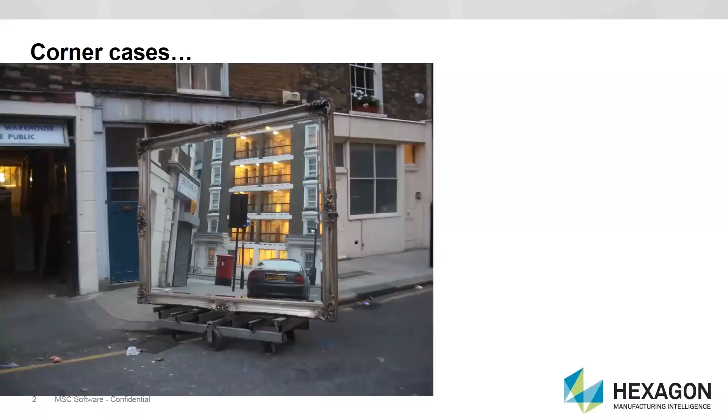So I typically have a different take on what a corner case is. A corner case is something that most of the time engineers don't think about. I don't think engineers are the best people, that they have the best attitude, to imagine these corner cases. We as engineers tend to believe in straight lines, in rigorousness. We tend to simplify reality so we can apply our knowledge. But actually, reality is way richer than our few physical laws. So think twice next time you think a corner case is really a corner.

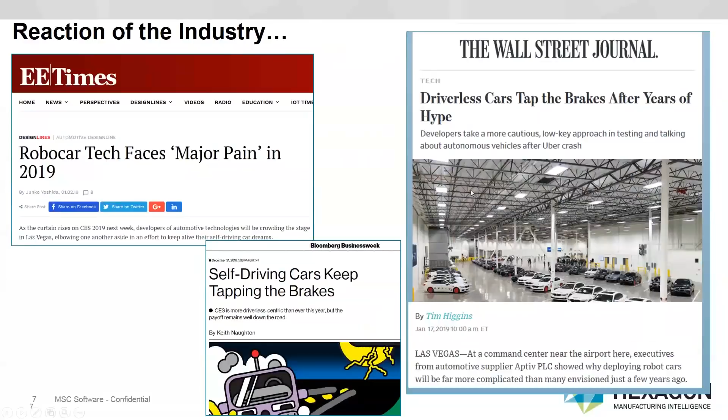You can't pretend that a human that is sitting in the driver's seat and is reading a newspaper is requested to take control of his vehicle and is able to manage a very complex situation that the system is not able to manage in a matter of seconds. You have to allow at least 30 seconds before the human regains situational awareness, takes control of the steering wheel, the throttle, the brakes, eventually even wakes up because maybe he was taking a nap, finds out what is going wrong in his surroundings, vehicles on his side, and then takes a meaningful action.

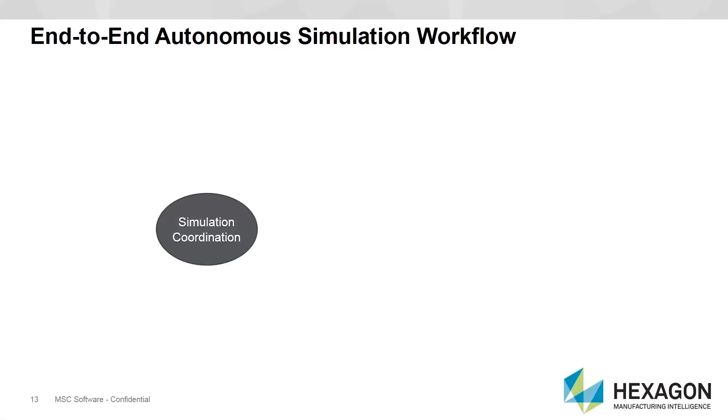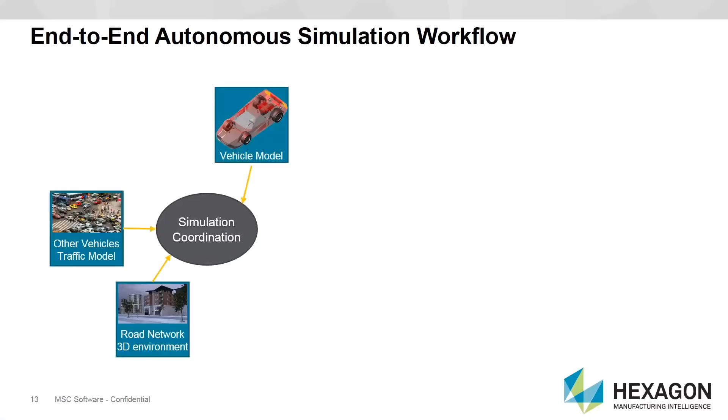So I take almost for granted that you have a vehicle model of your car, your truck, your bus, and this is the mechanical representation of the system. But then you need to build a road network and you possibly want to add a 3D environment like buildings, because buildings cast shadows. You want to model tunnels, because in tunnels your GPS signal may be weaker or absent altogether. And then you need to add other participant vehicles, typically bikers, motorbikes, buses.

Last but not least, weather conditions can affect sensors quite a lot, and rain and fog can very easily impair LiDAR and cameras. On the other hand, humidity has some consequences on ultrasonic devices and so on. And finally, pedestrians and animals. They are typically classified by Euro NCAP as vulnerable road users. So there are specific tests that, according to Euro NCAP, the vehicle needs to pass to be properly rated.

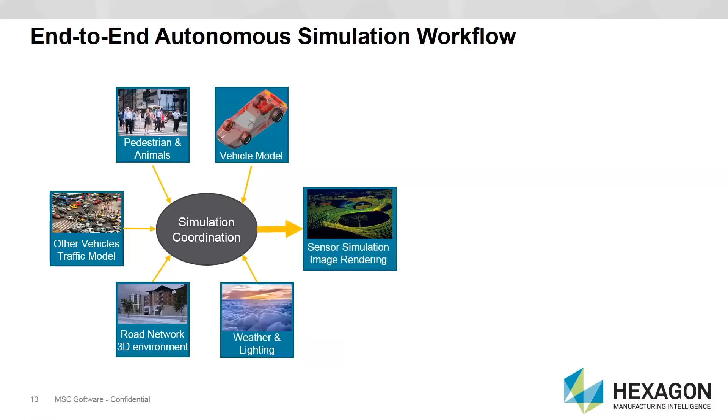Once you have all these ingredients in your recipe, the system will compute for you what your sensors will perceive of the scene. Of course, it will also provide you the ground truth, but most meaningfully it will create what your LiDAR, your radar, your cameras are seeing. And with this information, you can perform the typical steps of the self-driving workflow: the sensor fusion, the object detection, the prediction of the movement of the other actors, then the path planning of your own vehicle, and finally the actuation that closes the loop.

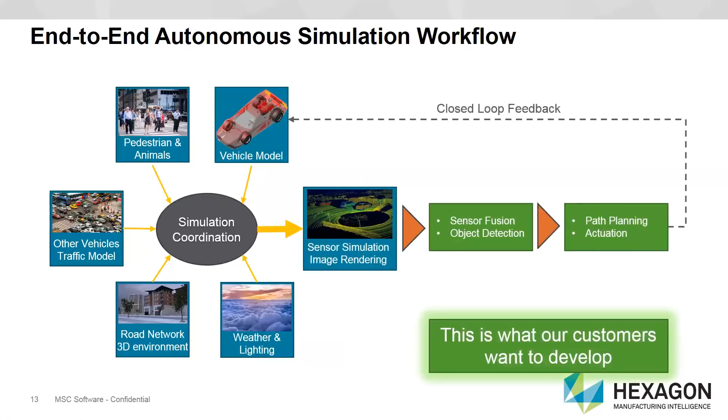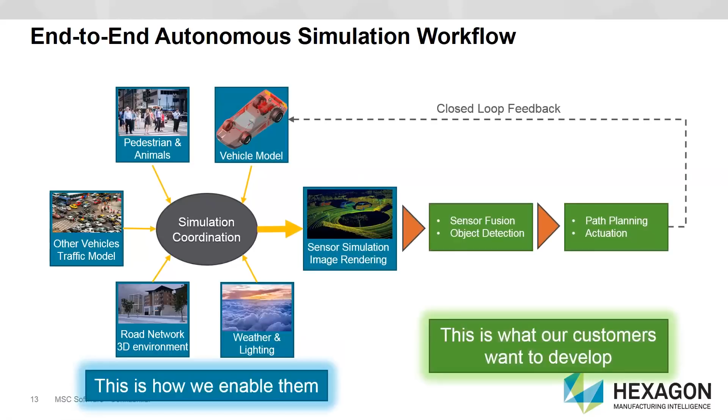In this view of the world, it's pretty clear that the green boxes are what our customers typically develop. We at MSC pride ourselves on enabling you to do this, providing a comprehensive solution for the simulation side of the story. Not always, anyway, is a full simulation workflow needed.

Sometimes, specifically for the perception phase, you can even leverage a very simplified vehicle model. You don't need that much about tire properties, not that much about damping, hysteresis, and so on. And then you basically need to generate tons and tons of images that then can be leveraged to train your sensor perception. So your AI for object detection, for proper clusterization, for determining the position of every actor. And this workflow typically runs at a speed that is far from real time, basically because you need the best accuracy in reproducing the sensor and interaction of the sensor with the environment.

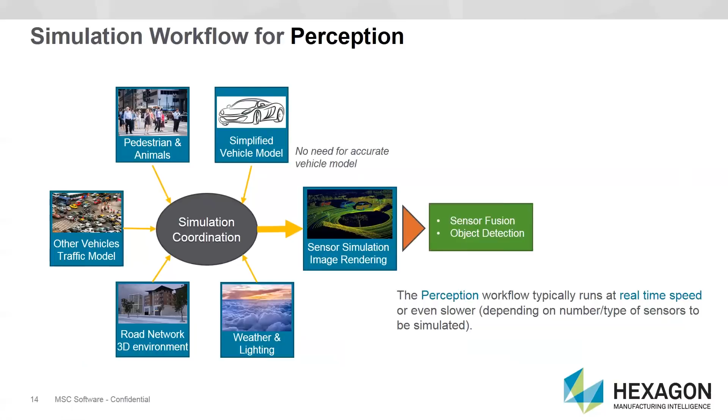Another specialized workflow is the one that is typically referred to as the path planning workflow. The path planning workflow has as a prerequisite that the vehicle has gained, maybe with some level of uncertainty, a clear understanding of its surroundings. So the sensor has already built the so-called object list: which other actors are on the road, where are they positioned, what is their velocity, their heading, and so on.

This is typically done with the purpose of training the safest path planning, the safest path forward for the vehicle, avoiding as much as possible any crash with any other participant. And exactly because we don't need to simulate the full rendering of the scene, it typically runs much faster than real time. In this case, you need a very good vehicle model because especially for evasive maneuvers, the tire friction, so the stability of the vehicle, can be really at risk.

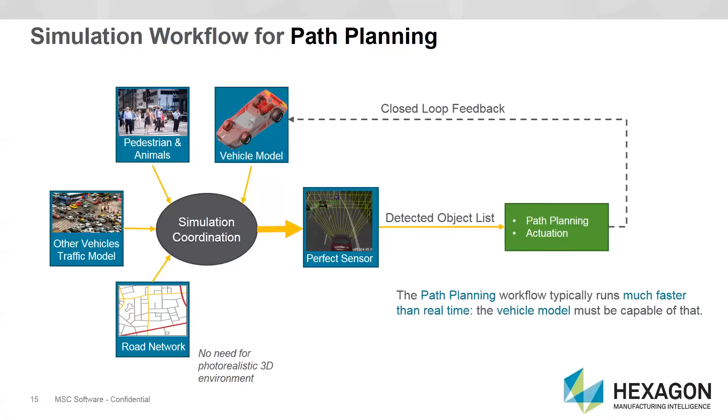So let me introduce VTD. VTD stands for Virtual Test Drive, and is an environment that allows you to do exactly what we have just described. You can design 3D environments, you can design roads, you can populate this environment with trees, houses, buildings, and many other props. Of course, you can inject all the traffic that you want according to predefined models, like the SUMO model, an open source model from the DLR, so a German model, or maybe supplied by a third party, like we are going to be very soon integrated with PTV Vissim.

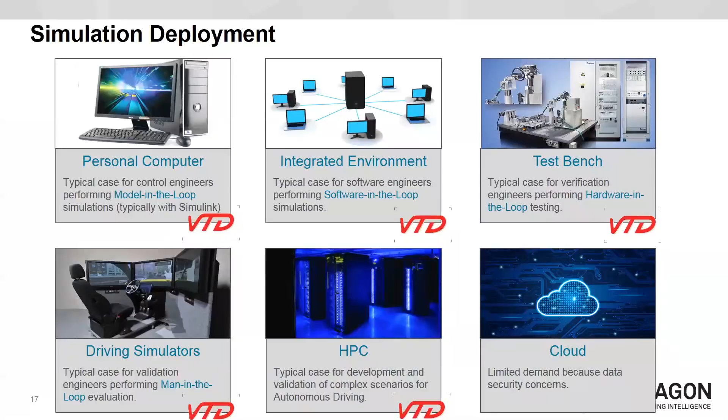And of course, we are moving into HPC, and pretty soon even on the cloud. HPC is fundamental, because we just said that we need to run millions and millions of miles of simulation, and of course you can't do that on your personal laptop. Let's go and check what is the current status of simulation adoption into this workflow.

At MSC, and especially thanks to the fact that MSC belongs to the Hexagon family, we have the chance to connect so many disciplines together. So we were just mentioning that you need a proper vehicle model, and in this case it's represented by ADAMS. ADAMS is the typical environment where engineers set up the driving attributes of a vehicle. You can design suspension, you can design the driveline, you can assess durability, NVH, comfort, and so on.

But sometimes you don't need this level of detail, so you can easily transform the vehicle model from ADAMS into an ADAMS real-time model that then, of course, can be injected into VTD, that, by the way, is vehicle agnostic, so it can use vehicle models coming from different sources. And then VTD will combine this vehicle model with the AI driver, with the traffic, with the sensors, and the 3D environment, so that the simulation workflow can be completed end-to-end.

Another part of the story we are working on at MSC is the data management, and then closing the simulation loop. Because if you are generating millions of miles at every iteration, it's virtually impossible for an engineer to look at single results. So you need a way to have proper data analytics, to have KPI and dashboarding, and possibly to have some smart sampling technique, some AI-assisted workflow that lets you dig into the cases in which the vehicle isn't really behaving as expected. And this, of course, is depicting the simulation side of the story.

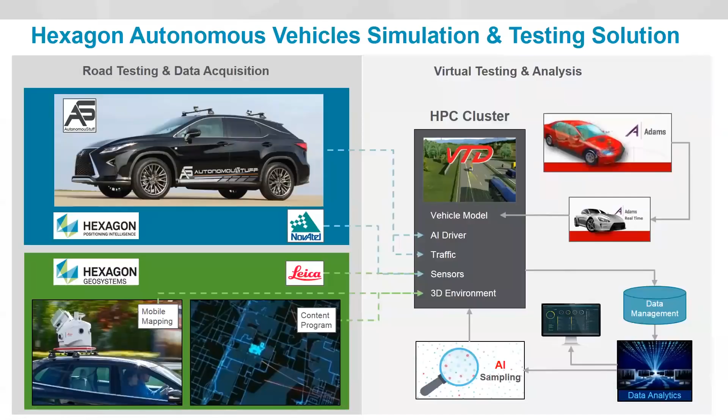The other initiative we are working on is leveraging the content program of Hexagon, where the whole US territory and the whole of Europe has been mapped from the air with cameras and LiDAR, with a resolution varying from 30 centimeters for country zones down to 5 centimeters in cities with more than 1 million inhabitants.

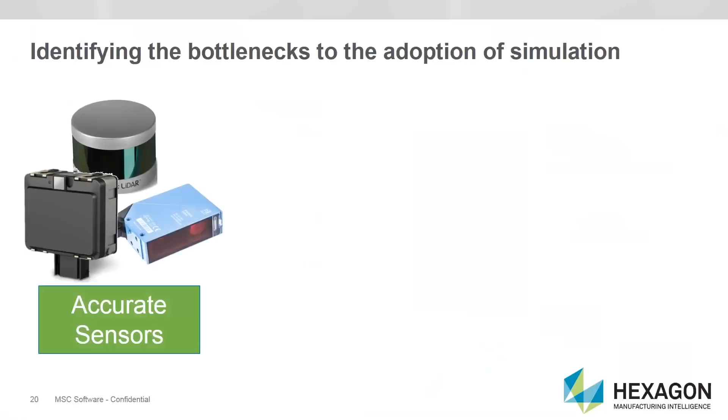So, given this richness, which are the bottlenecks? Why is simulation sometimes perceived as not the way to go forward? Well, first of all, the question that I receive the most is, how accurate are your sensors? And this to me is a very important question, because the most important thing a sensor model needs to be able to deliver is not the accuracy, but how it resembles reality. And the real sensors are not 100% accurate. So you need to be able to reproduce this inaccuracy of the sensor. You need to reproduce how the sensor will interact, for example, with the raindrops. So the LiDAR beam will be scattered and you will not receive that information back. So that's definitely one of the top points.

The other point is about building these 3D environments. If you need to simulate millions of miles and you want to test in diversity, you can't simply run and rerun the same 100 kilometers. You need to have different environments for highways, for urban areas. You need to have super elevated roads. You need to have tunnels. You need to have small villages and crowded cities and so on.

But if you build these environments manually, is it really taking forever? Last but not least, if you're simulating really millions of kilometers, you are generating petabytes of data on a daily basis. So how do you get the best out of all this data? It's true, data is the new oil, but the oil needs to be refined before being injected into your car tank. So let's give a look.

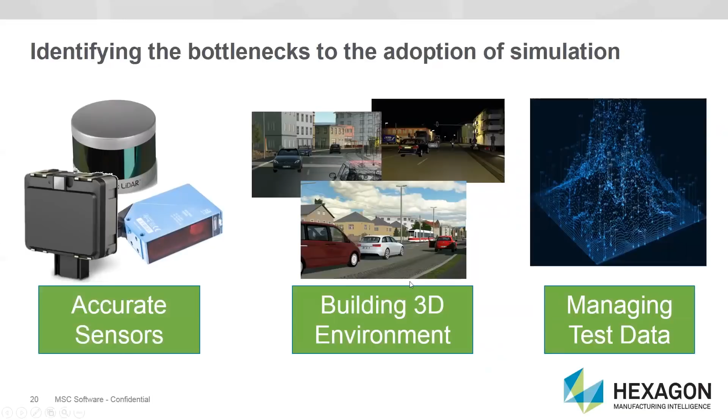Well, as I told you, the ideal sensor does not exist in my opinion. It really depends on the task that you have to tackle, and that's the reason why with VTD we have different levels of accuracy and speed provided for the same sensor. So you may want to simulate a LiDAR, for example, as a perfect sensor. As a perfect sensor, whatever is in the range of field of view of the LiDAR will be notified to the system as perceived. In this way, you don't need to solve any intricate optic equation.

In the advanced sensor, you start injecting some error model, and this error model, of course, will start taking into account that there may be some occlusion, there may be some Gaussian noise or other kind of noise, there may be some point that is statistically missed, and so on. And finally, you can dive into the physics-based sensor, in which, staying with the example of a laser beam, you want to see the propagation of the single laser beam.

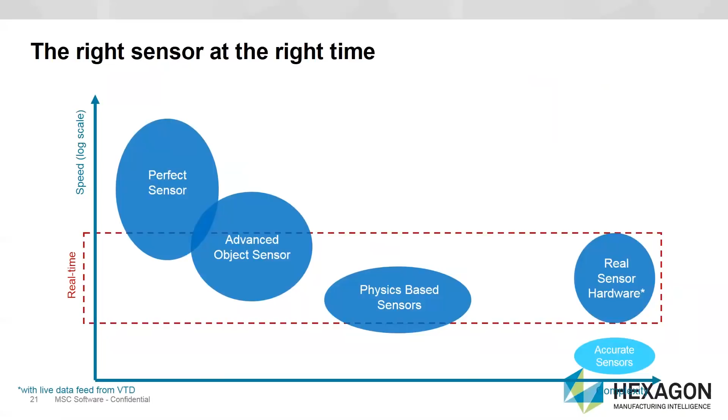You want to see how this laser beam interacts with the surface of the material that it hits, and you want to know how the material absorption is in that wavelength, what is the scattering, what is the forward scattering. You want to know the multiple bounces of that beam, because multiple bounces will typically create, for example, artifacts like ghosts. Finally, last but not least, because customers enjoy this as well, you can really plug the actual sensor into the simulation, and this will become, of course, a hardware-in-the-loop simulation.

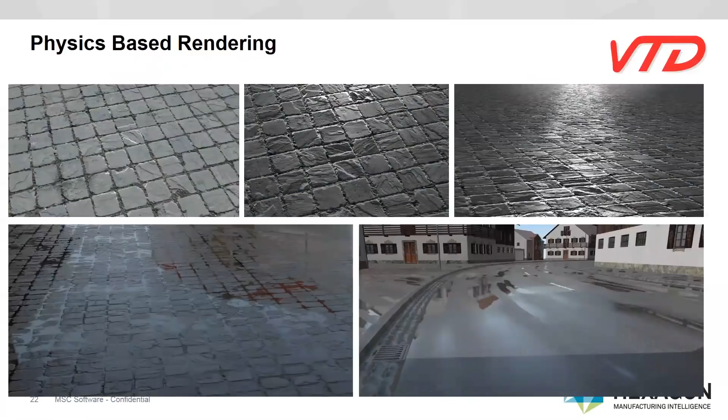Here I prepared for you some images showing the rendering capabilities, and all of this can be done in real time. As you can see on the top, these tiles are not just texture. This is really a 3D surface in which light can bounce, and the same can a laser beam. So all of these materials will scatter the laser energy in multiple directions. And of course, road wetness will definitely change the reflectivity, even creating some ghosts from the camera point of view.

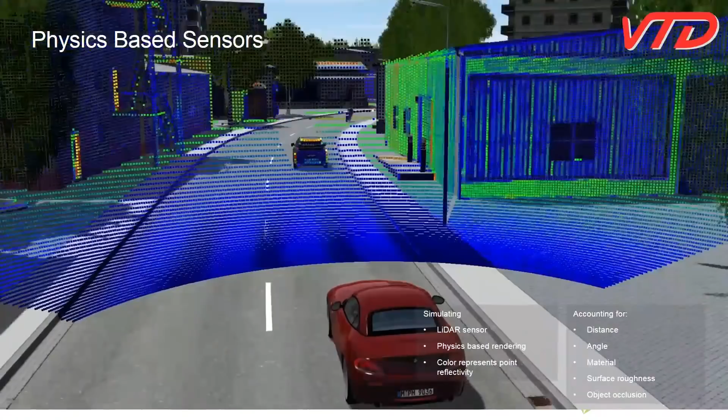Here you have an example in which we are coloring the points generated by a LiDAR not according to the distance of the point from the vehicle itself, but according to the energy that is reflected by the point that is hit. So this energy, of course, changes depending on the material that we are hitting and on the angle that the beam itself has on the surface that is hit.

So moving to the next point, we already said that if you want to build a 3D world in which your car can travel, you typically have a couple of chances. Either you build this world manually, and of course in this case you have full control of the environment. You typically tend to minimize the number of objects that you inject, but this on the other hand allows you to have a very nice parameterization of the scene. On the other hand, it's very time consuming. An estimation is about 6 months to build 100 kilometers. That's a typical estimation that we have in this field.

The other possible workflow is based on measurement. There are several kinds of measurements available, typically leveraging either stereo camera or LiDAR measurement. And this is typically much faster. Of course, you have a dependency on the measurement process, and you can't measure everything on bad days: with a camera workflow, you can't go and measure during nighttime, and with a LiDAR-based workflow, you can't go and measure on rainy days. But apart from this limitation, the workflow is pretty stable.

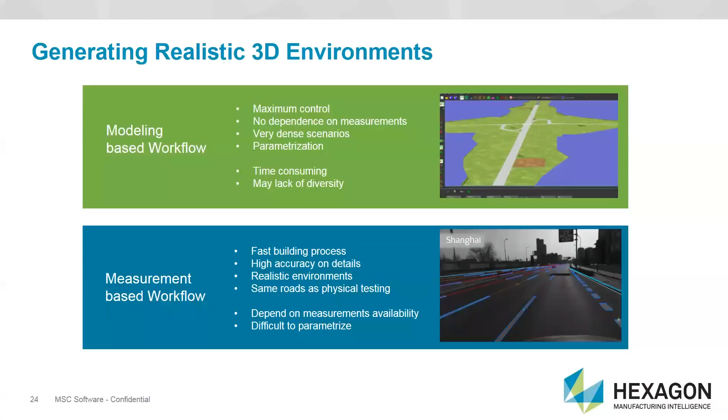At many of our partners it is mostly automated, so they can generate these 3D environments in a fraction of the time that you would otherwise need by hand. What we are actually doing, as I mentioned, is to leverage the Leica Pegasus 2. It's a lovely piece of hardware, pretty heavy, but a couple of young guys can easily manage it. It can be installed on the roof of a vehicle.

And as you can see from this image, it is equipped with plenty of cameras in the surroundings. These cameras have quite a long focal length, so they're used to look at signals and stuff that is not exactly close to the road. For the near road, there is the 360 camera that is on top of the Pegasus.

The system is then equipped with a survey-grade LiDAR. So this is a LiDAR that is in the range between 10 and 30 times more accurate than the LiDAR that a self-driving vehicle has, and is producing more than 1 million points per second.

This LiDAR will give us, last but not least, not only the position of the point of the road that has been hit, but we can also record the energy that bounced back, so we can have a classification of the material that belongs to that point.

So from the camera we know the color of that point, from the LiDAR we know the position in X, Y, Z, and we also have an estimation of the material properties of every single point that then will be clusterized. The system is then completed by a GNSS antenna, of course from NovAtel, and an IMU,

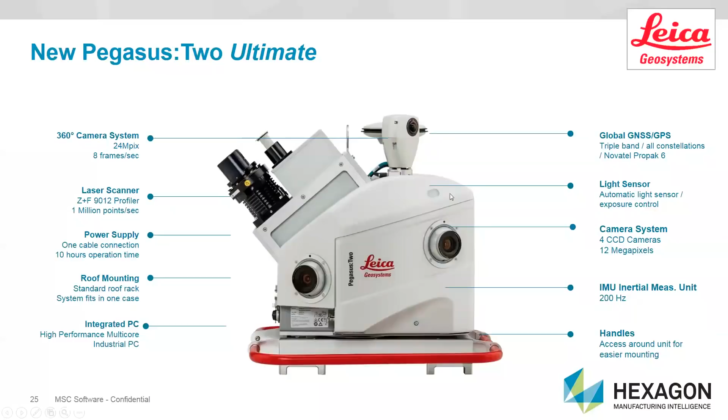So what is the workflow? Well, as I told you, you start with this very nice piece of hardware. You can very easily scan 100 kilometers in just one day. All these measurements are directly digested by Road Factory. Road Factory has a 90% automated workflow. The 10% that is missing is typically because you want to have some quality checking of whatever has been extracted.

This will then write an OpenDRIVE file that can be validated before being used in simulation by the OpenDRIVE validator that we developed, and will also give you the orthophoto. So you have also a very clean, very nice top view of the scene.

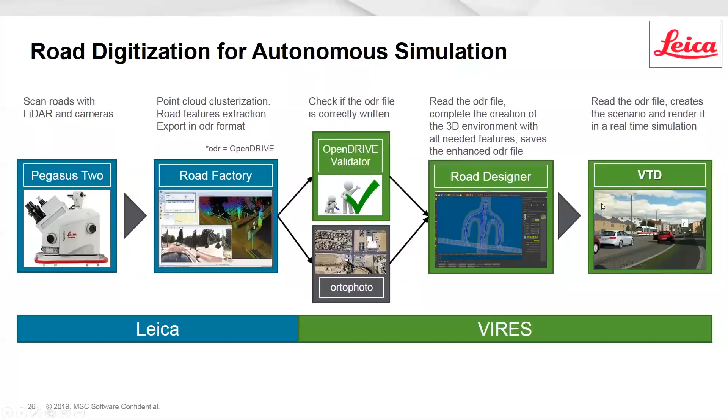All this information can then be imported into the Road Designer, that is a module of VTD. And then in the Road Designer, you can complete the description of the scene, for example, adding buildings, adding street lights, and so on. Finally, you can perform the simulation using VTD.

As an example of the scanning process, I want to give you the one of San Francisco. So the length that has been scanned is a little bit more than 240 kilometers. It took just 18 hours to go through all the roads that you can see here. The processing time was then 40 hours, and within these 40 hours you can see the level of accuracy you can achieve from the image below.

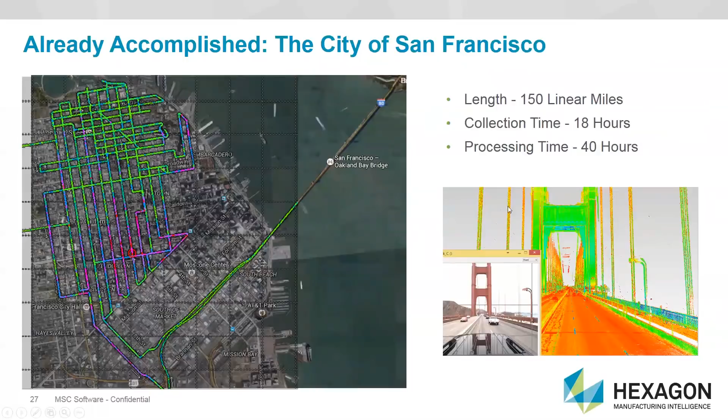And finally, as I told you, you are mostly interested in your system under test, and this means your vehicle, the sensor, the AI driver, and so on. So this is the piece of information you want to validate through the simulation process. Great, you typically leverage an HPC center to do this, and this will create for you a ton of data.

This data has then to be processed with data analytics. You need to specify which are the key indexes that you are really interested in. Some of them will refer to safety, to functionality, and to comfort of the passenger itself. And then, according to your metrics, you want to enable the next iteration of the evaluation of your system to go and dig in the areas that are most critical for your vehicle.

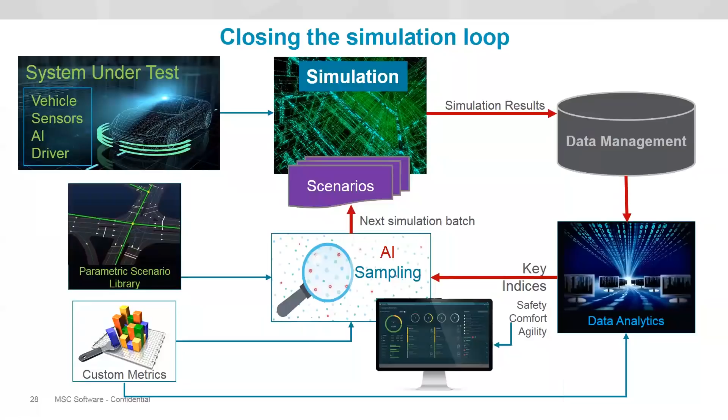So this is something we are working on. We are currently developing this concept. It is at the moment a proof of concept. As you can see, it includes generation of a variety of scenarios through permutation. Essentially, you can permutate the logic of the driving participants, so how many pedestrians, what is the speed of every car, what is the position, and so on.

You can permutate the static parameters of the scenario, so what is the width of the road, if the lane markings are freshly painted or worn out, and so on. And finally, you can also inject all sorts of errors of the sensor. All of these then run on an HPC cluster. Typically, thousands of parallel simulations are needed.

And then all this data is pre-processed, and in this case can be analyzed via some data analytics tool. In this case, Tableau has been used.